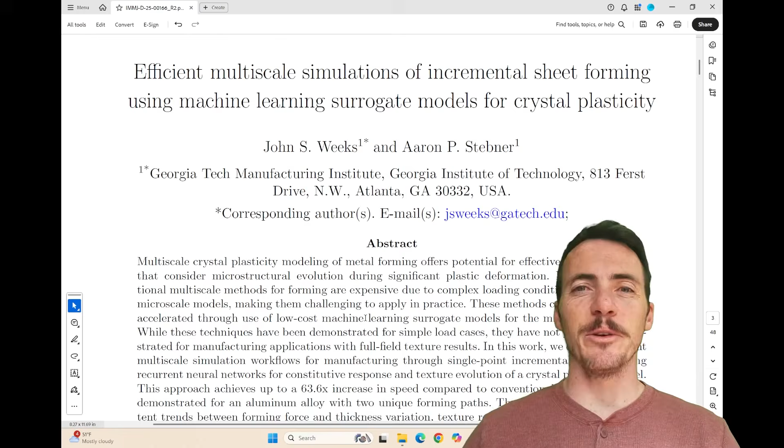Let's dive into it. Okay, incremental sheet forming falls in this broader camp of things called metamorphic manufacturing. It says here this is a manufacturing approach that uses numerically controlled incremental deformation in order to achieve complex shapes and tailored local properties. So instead of casting some complex shape where everything in that is going to have more or less the same properties, if you deform that material to come up with a net shape, then this spot over here might have a different set of properties than somewhere over here. You can actually design this to have locally relevant properties.

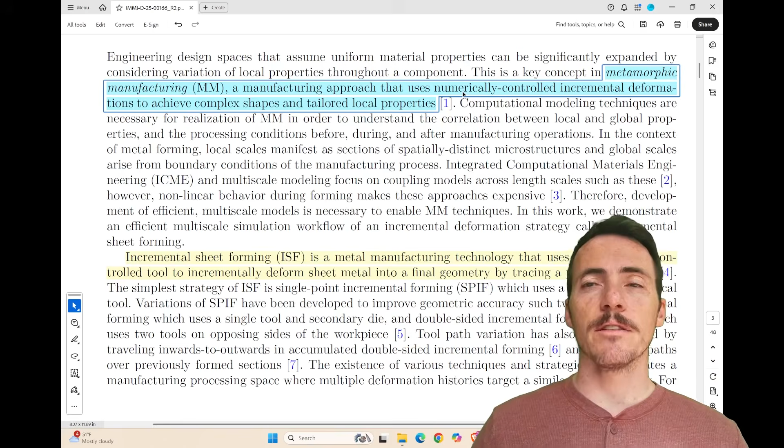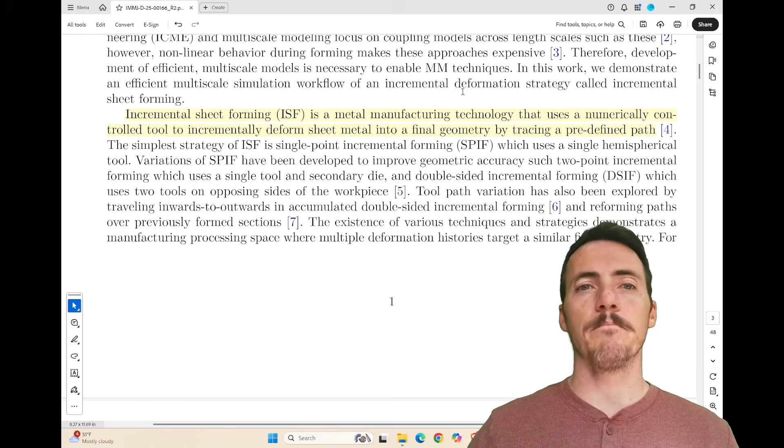So it says incremental sheet forming is one that does this. It uses numerical control to incrementally deform the material into some final shape. And there's different ways to do this, right? There's single point, but also variations like double-sided and so on, okay? Whichever process you're using, you're going to want to model how, when you deform the material, what happens to the microstructure. So you're going to be deforming a material and modifying the properties near the deformation.

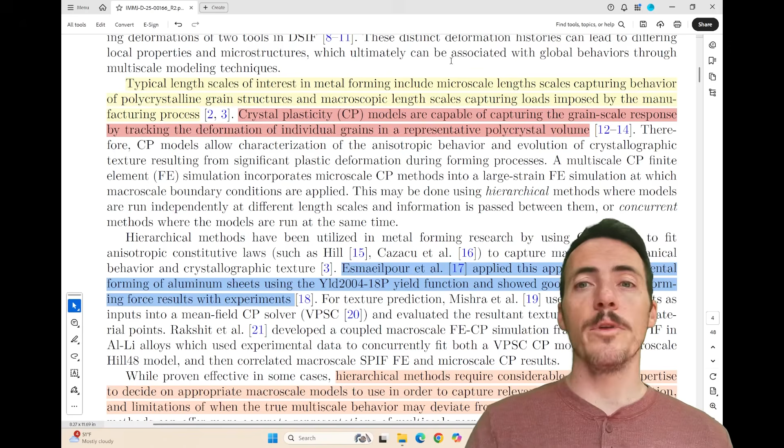This means that we have different length scales of interest. For example, the grain evolution behavior is going to happen at a very micro scale, but the deformation is going to be a macroscopic deformation. And the way to merge these two length scales is typically done via crystal plasticity, where you can actually model the individual grain response, tracking individual grains if you want within some representative volume element. And this has been done before.

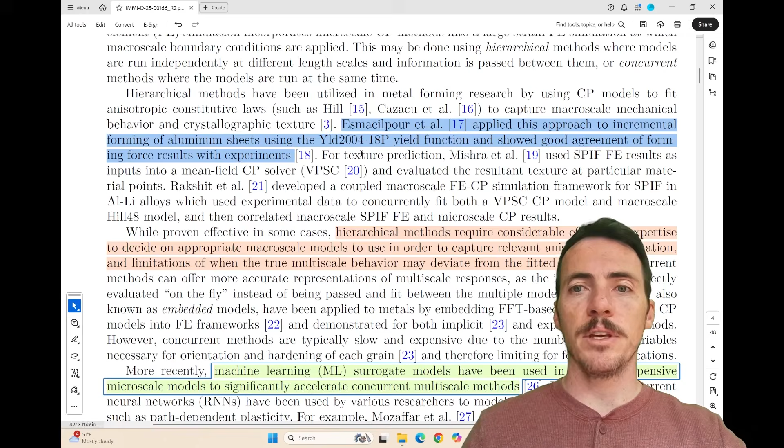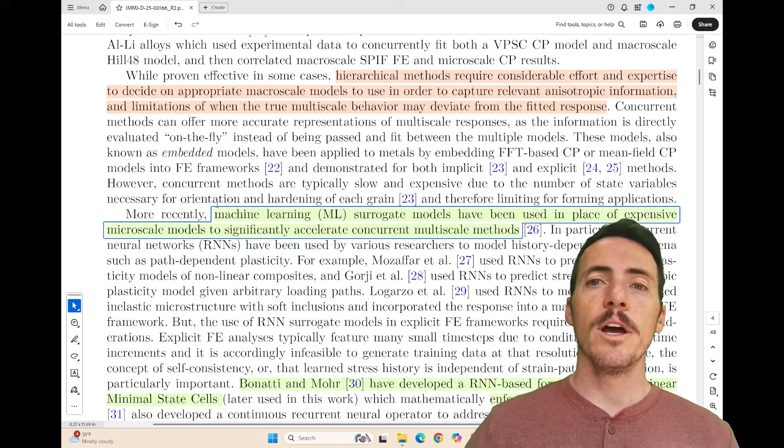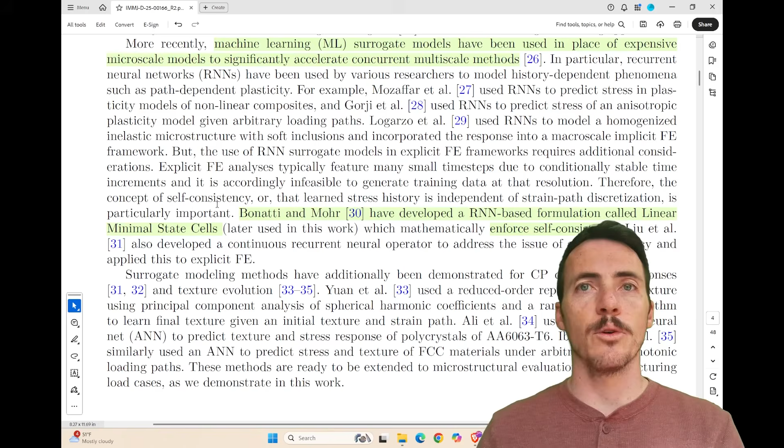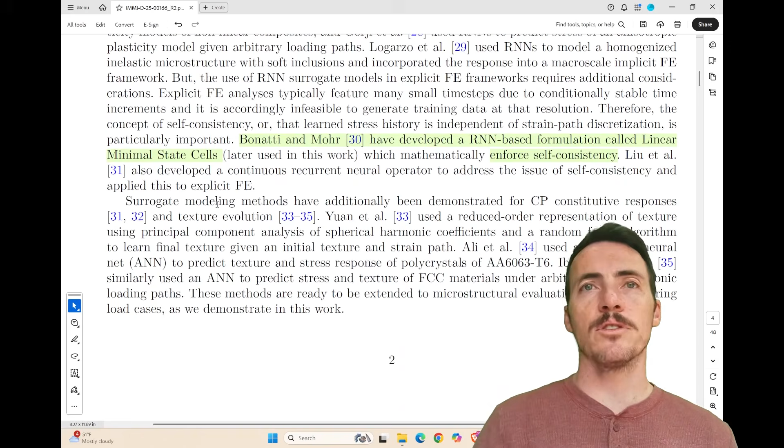But the innovation that these authors are putting forward is the possibility of using machine learning surrogates instead of those. And they're not the first people to consider this either, right? There's been a number of papers primarily using recurrent neural network architectures. And that makes sense because a recurrent neural network saves some information about the previous state when it captures the next state. So in incremental forming, that's going to be really important. The one that they actually used here comes from Bonatti and Mohr. This is a recurrent neural network they call Linear Minimal State Cell, which is able to capture self-consistency in this process using the history dependence.

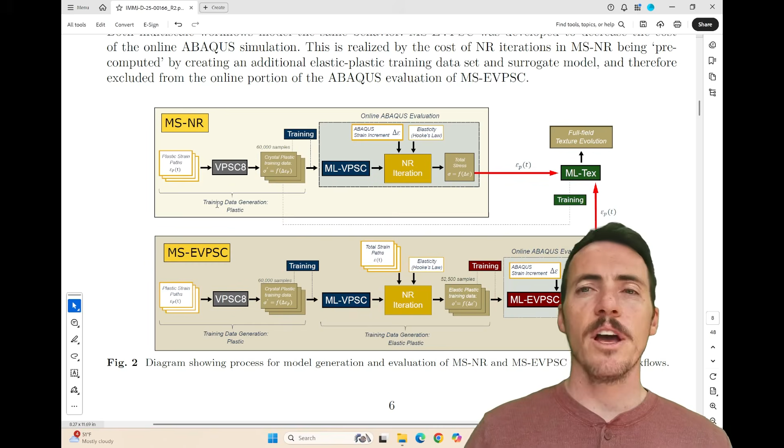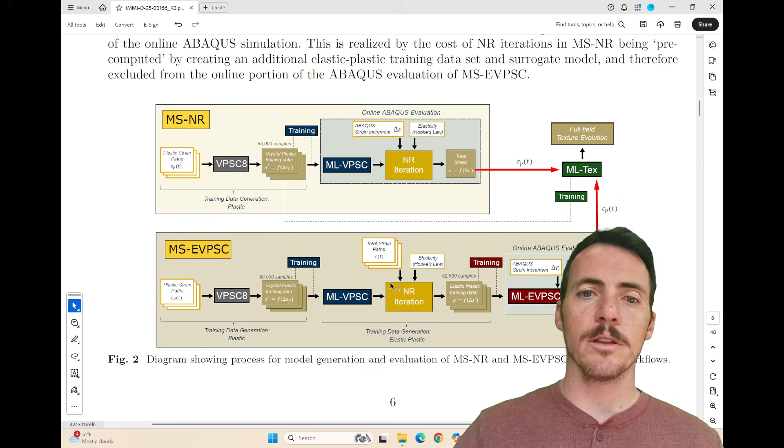All right, so they're essentially going to use a machine learning model to replace the crystal plasticity model. There's actually two different ways that they implement this. You can read about them in their paper, right? But basically they have ML-VPSC, which uses it once, and this ML-EVPSC, which actually uses two different machine learning iterations of the crystal plasticity model. What we always care about in these surrogate model types of situation is, can it actually reflect the more difficult, time-consuming modeling? And it does.

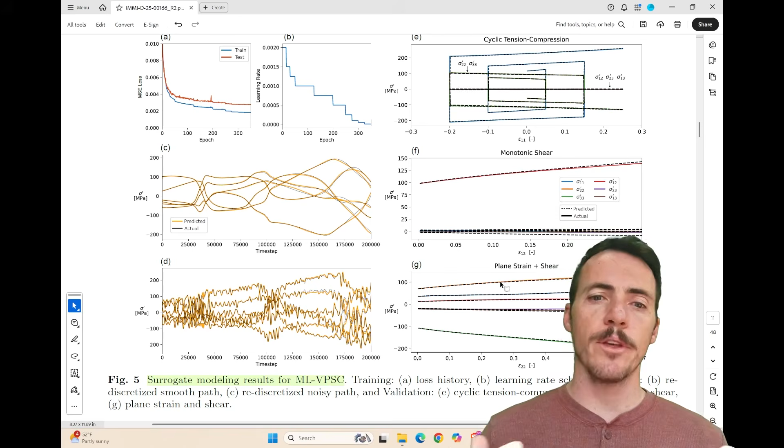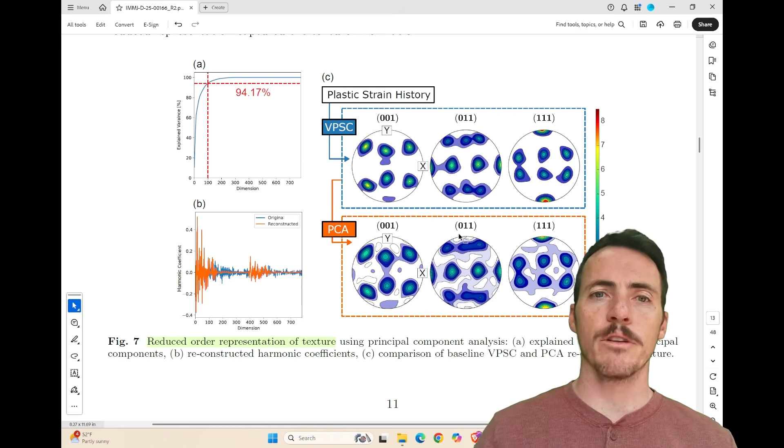Comparing the dotted versus the solid lines here, it's able to match it really well. This is for the ML-VPSC. It's also able to match it really well for the ML-EVPSC. And another way to tell how good the model is working is to compare the actually evolved textures. So comparing them, we're able to see how well these things actually match. Here, for example, is comparison of ground truth of the VPSC's textures with their ML counterparts, showing pretty good agreement.